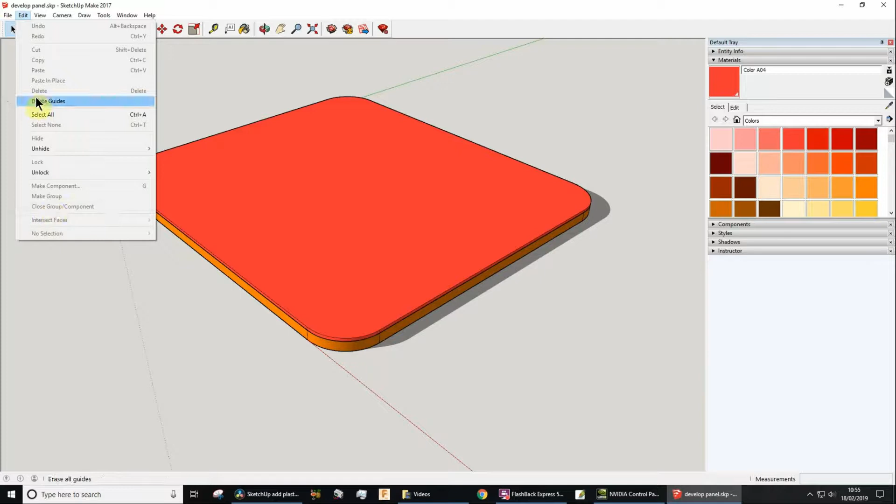So I need to have some guides. First I'm just going to delete any existing guides because I don't want any there, but then I'm going to view the guides, make sure that you've got guides on, and then I'm going to use a tape measure. I press T for the tape measure and then I just drag in from the edge, and once I've released the mouse, I can type say 30 millimeters, press enter, so it's set up a guide there. Now you're going to need to specify the correct settings for you, so these are arbitrary really.

So let's just say 25 on this side. Maybe I'm going to inset by 25 there, so you can press 25 like that, and then you can go in, whatever amount it is, so maybe that's 40 mil there, press enter.

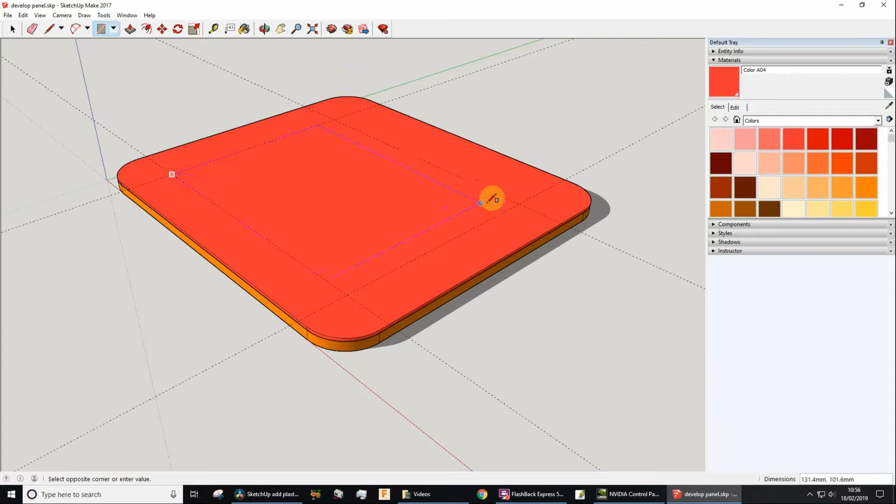So I've defined this area in the middle, and this is the area that I'm going to then raise up using the push-pull tool. But to do that, first I need to draw a rectangle there, so I'll just go in that corner like that, and then press P for the push-pull tool, and then I can drag up. Don't forget, you can just drag it up whatever amount you want, and then you can type in the height that you need, so let's say it's 45 millimeters, and press enter. Okay, so that's looking quite good so far.

Now in a typical vacuum form case for a student, you're going to have slanting sides. The easy way to do that is to change to the line tool. I pressed L, and remember you could set guides as well to get the right height and things like that. For the moment I'm not going to do that, just to speed things up for the video. So I'll just draw a line across there, and then I press P for the push-pull tool and push that out of the way.

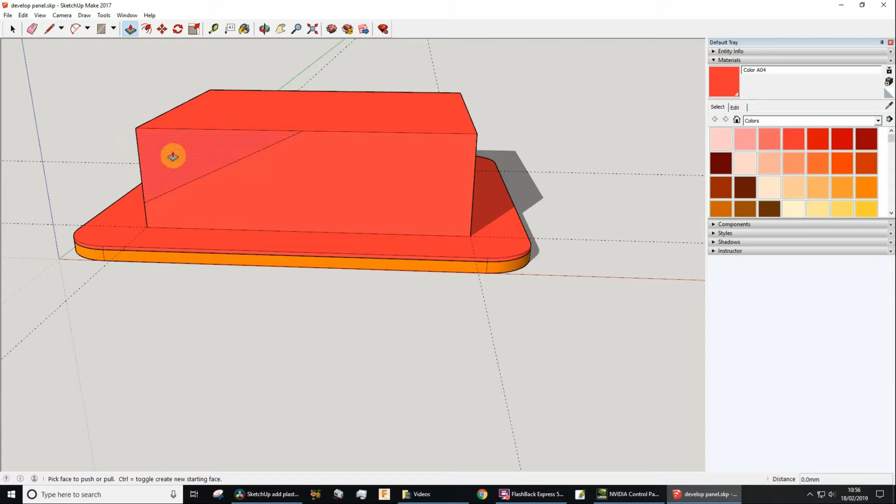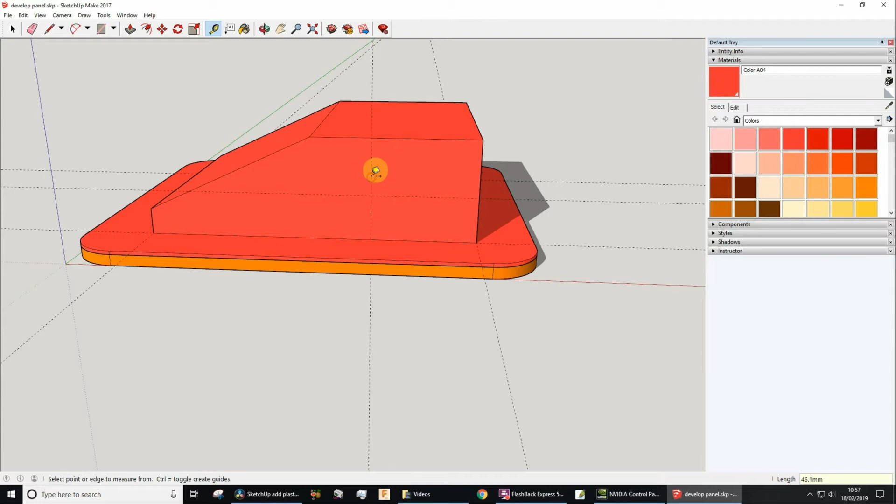Maybe I want this one to be curved, and to do that I'm going to need an arc there. So let's say I go down like that, let's say 25 mil, and then I'll go in and type 25 there, and then I press A for the arc, and go there. It's a 2-point arc, and remember in the previous video the importance of that purple thing there. If you haven't watched that video, do it because it's useful, and then press P for the push tool.

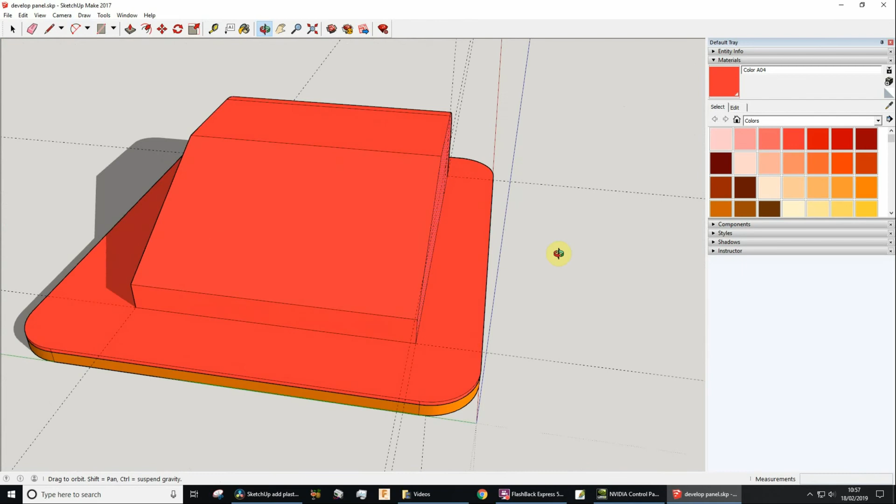So you could add more detail, but basically that's not a bad representation for many people of roughly what a vacuum form case might look like. I just go to edit and delete those guides because I don't want them there. And don't forget, you can also turn off other things, like the axes or whatever it is you want to do. Okay, so end of video here.

In the next video I think I'll show you maybe about adding some screw heads, maybe a top panel, something like that, some switches and things. Okay.